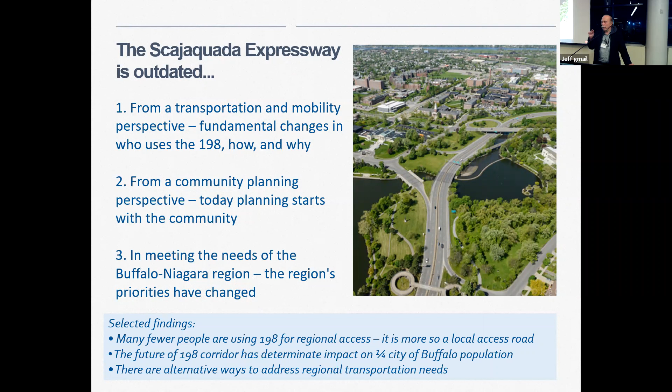One of the things that Hal did, wherever he deserves a lot of credit for - I don't know if he claims it, but he's the one who came up with the idea that instead of looking at Buffalo as a region to develop the context for this planning, let's look at the area, the people impacted by the expressway, and use that as the primary focus site area for planning. Hence the invention of Region Central, which I promise none of you had heard of before Hal invented it, because it wasn't a term. He literally said, this is the place that should make the decision, partly because you will all take the larger region's needs into account. You all share the same place, but it is from this physical base that we should plan in the 2020s, because these are the lives that are impacted.

Is this making sense? These are the people who decide I want to live here or not, which is what matters.

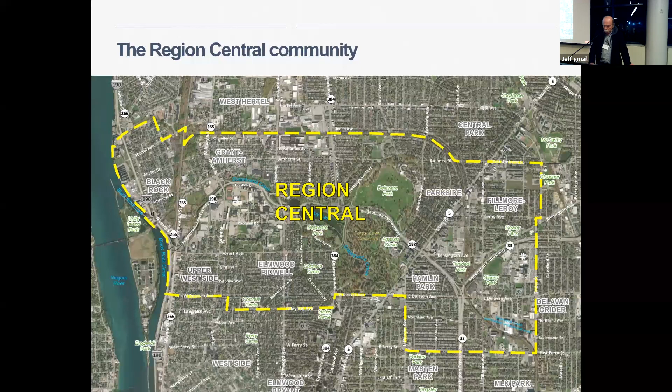So the process that many of you have been involved in for much longer than I have began with years of this - to review the planning history of this place. How should I say it - it brings some frustration, because it basically ground to a halt for the right reasons. They couldn't make a decision because they didn't have the right alternative on the table yet, because they didn't have a process for getting to the right alternative. And that's not a criticism of anybody. It's because we learn as we go.

So people learned, and people like Hal developed a new process from a baseline analysis that really looked at Region Central, what its needs and aspirations were, engaging folks like you who have a terrific and very generous set of values. I want to say one of the things we observed quickly is that there are not conflicts among you as to what the priorities should be, which is very interesting.

You all tend to, and I hope I'm not overclaiming, share the same priorities for a more livable neighborhood, a more equitable Region Central in Buffalo, a place that nurtures economic opportunity as it's understood in the 21st century when we have a knowledge economy that is what grows.

You are very interested in not just reclaiming the Olmsted legacy because it's something to be proud of, but because it was grounded in a wonderful way to enjoy and celebrate nature in the midst of a city. And it's been really inspiring to us to see the visceral desire to bring that back and have access to it and give everybody access to it.

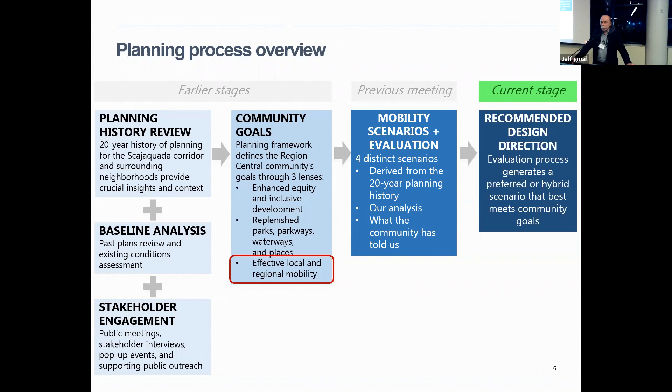So on that note, thank you so much for being here. Ask us any questions, we'll be gathering in front of boards you don't see yet afterwards. When I come back in 20 years, I hope to see you all at yet another meeting celebrating the fact this is open, maybe in 5 years. Anyway, thank you very much.

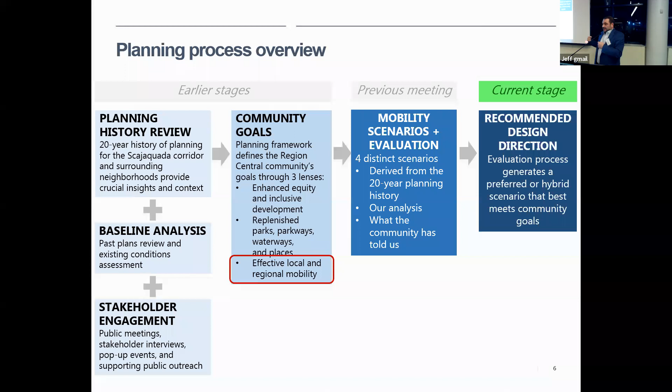Just to go over this, this is where we are. We're all the way at the end of this process, where we're going to present to you the recommendation of your process, right? All of our work and interpretation of everything we've heard and seen boils down to this. We did much work in the beginning: review of all the work done before, analysis, heard from all of you, translated that into goals, what do you want to see, and then developed scenarios and tested them. I'm going to go through that a little bit and then where we are here today.

If you were here in May, and many of you were, you may remember we developed 4 scenarios and asked you to comment on them. Many of you told us which ones you liked, and that's fine, and we adapted those based on the feedback we heard. Those 4 scenarios represented a kind of range of outcomes, and our goal here is not a final design, it's a design approach. I'll explain that a little bit later.

Those 4 scenarios ranged from something that is the status quo, a corridor that looks much the same as it does today but better, all the way down to something like full removal, as if there was no road, no highway, nothing else, replaced with parkland or something that looked more like what used to be there before they built the highway. These are the exact visuals we showed at that meeting before you all marked them up and commented on them, showing those approaches to the corridor, where there would be a road, intersections, ramps, new crossings, and what we might do with some of the parkland or things that would replace it.

We presented all of those again. By the way, if nobody said it, all of these slides are also going to be available online, people can go look at them, I can spend more time with them. So I'm not going to spend a lot of time reading the details of them here, they're too rich for that kind of environment.

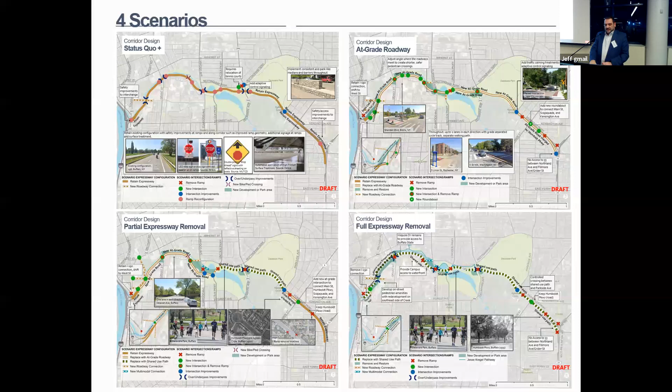Many of you commented on the specific scenarios that we were testing. You may not remember, but you also commented on these - these are the lenses, if you will, that we said, these are the things that you care about.

These are the things we heard from past processes and through this process, that you wanted a Scajaquada corridor and a region central that accomplished these things, right? We really put them into 3 buckets. The first is effective local and regional mobility. That means many, many different things.

And we broke those down further, and there's an example in the green of how we translated that into metrics. So something like, how many locations are there to cross the Scajaquada corridor? And we evaluated each of the scenarios against that, as well as the existing.

The second is replenished parks, parkways, waterways, and historic places. So how much can we recreate what was here or make it better in today's context, not an 18-whatever context?

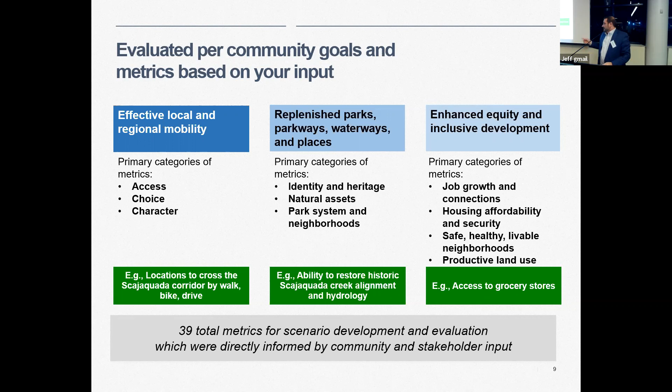And then the third is enhanced equity and inclusive development. And again, we translated all those big picture titles into specific goals and metrics, right? And you all commented on those and we adapted them based on those meetings. We developed subcategories. Believe it or not, we developed 39 of them, total metrics for all of these.

And that's the work that we've been doing since May as a team, as a full team, including the GBNRTC folks, is taking each of those scenarios, developing them to a certain level of detail so that we could evaluate them against those goals and metrics.

Now, 4 scenarios, 39 metrics. If I tried to talk through all of them, we'd be here for 5 hours and you would be running me off the stage. So we're not doing that tonight. All of that will be available.

That's not to say it scored the highest against every particular metric. We paid particular attention to those things and tried to adapt that scenario and others to include the things that work the best. So we developed from this a hybrid design that builds off of each of those.

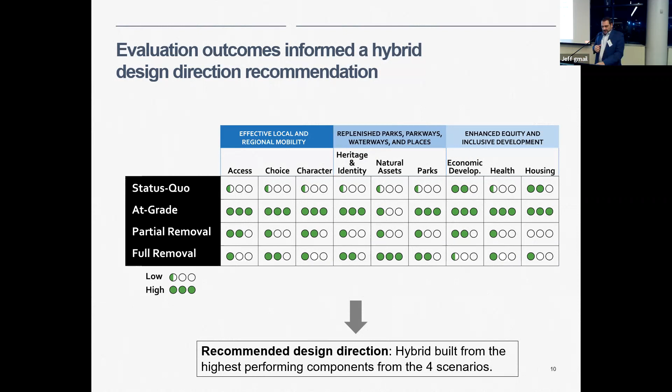And before we do the full reveal, I want to talk a little bit about what we think that does and what we tried to capture. So the recommended through this process, what we're calling Scajaquada Parkway, name is up for debate, is similarly Olmsted Parkway inspired.

It has at least 1 lane in each direction with a potential sometimes for a carriage road. So there might be a through road and a separate road next to it within the right of way for certain segments. Has bike paths and sidewalks throughout.

That was a big part, by the way, of what we heard through the process is how much the current highway and creek actually divides neighborhoods. It actually acts as a barrier, and we proved it with a lot of data.

If anybody remembers the mobility guide and some of the stuff that was put online earlier, it really shows how, depending on where you lived, you did not go to the other side of the expressway. People just don't. The majority of people live their lives this way or this way, not across, in ways that you don't even realize. And again, the recommended design here removes all the ramps.

Even as it exists, many of those ramps we've shown you are substandard. They're short, the mergers are difficult, they're safety hazards. In this, and I'll show you some examples of what this looks like, with 1 lane in each direction, all of the ramps are removed except for ones, and you'll be able to see some of the details that are kept for a specific purpose and replaced essentially with at-grade intersections.

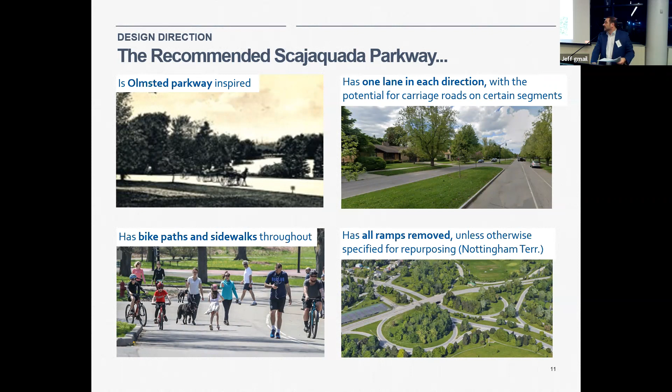And that's what it is, what it does from a public benefit standpoint. You know, and again, having gone through all the metrics, we think that the recommended parkway really enables restoration of parks, resources, heritage assets, not all of them, not exactly the way it was, but the potential to recapture much of that, and in some ways do it in a way that works for today's world.

It creates safer, more direct and enjoyable connections, not just for people on cars, for people walking, for people bicycling, for public transportation. All of those were part of our analysis. They're part of the things you care about. They're part of the metrics.

Again, we think it enhances safety, health, vibrancy of the surrounding neighborhoods by creating more and better ways to access the road, the creek, the park system, and the other side. And as part of doing that, you're able to connect more residents to job opportunities, to economic development. You're able to find ways to reknit some of these neighborhoods back together.

All right, that's enough buildup.

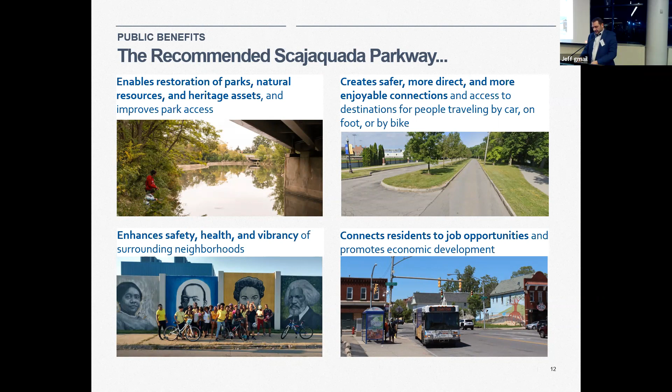So this is our recommendation as a result of that process. I'm not going to read every single thing that's on here. There'll be boards that are hidden for this moment, but as soon as this presentation is over, we'll put them up. You'll be able to walk up to them and ask questions.

So what we're showing from west to east is an at-grade roadway that is essentially one lane in each direction. It has the ability to have turn lanes and things like that, more crossings, additional crossings. I'll show you some cross sections of what we think can be replacing where the expressway is today on the next couple of slides.

We're in some cases removing interchanges. In order to accomplish this, we've stress tested this a number of times. There are places where we're recommending additional on or off ramps, because essentially what we're doing is distributing all of the activity in a different way.

So there are going to be places where there's better pedestrian activity, better bicycle activity, and there's going to be other places for cars to go.

And if anybody remembers, one of the things we looked at earlier is that actually very few people ride in cars from one end to the other. It's less than 20% in one direction, less than 10% in the other. Most folks even on the Scajaquada Expressway as it exists today are really going somewhere in the neighborhood. We're using this as a kind of local distributor.

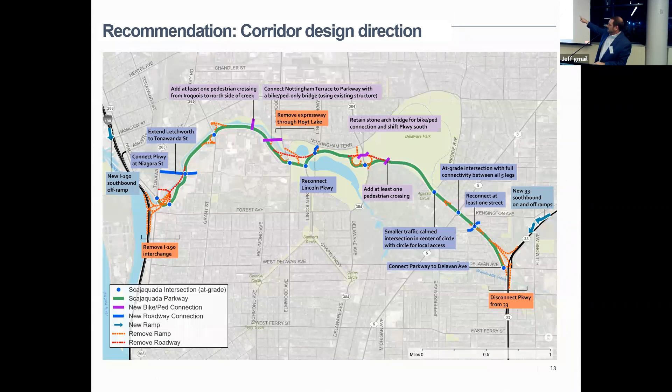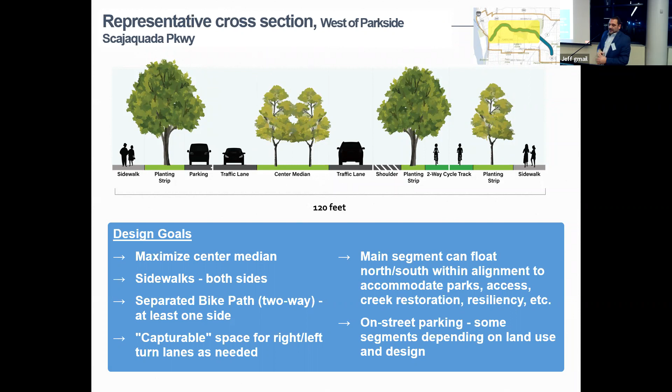And by the way, this is the section of the Scajaquada Parkway that is west of Parkside Avenue. We have a little graphic in the top right, a locus map, that shows what that recommendation is. East of Parkside, which is the traditional Humboldt Parkway section, it's actually even wider - there's a wider cross section there. You're in a cut for part of that.

We're talking about that would be raised up. The intersections would be at grade. You'd have a center road, which would be essentially the through road there, and then calling it a carriage road along either side.

That's more along the frontage of where the houses are, where those residences are, where any of the other land uses are. So that would be the more local access, and then within the middle, you'd have that through lane.

You'd preserve the parking on the carriage roads. Within the center road, you would not have that - you'd have planting strips, you'd have room for bike paths. And again, all of this is a design approach. The specifics of exactly what goes on any of those strips or how that looks are all things for the next process.

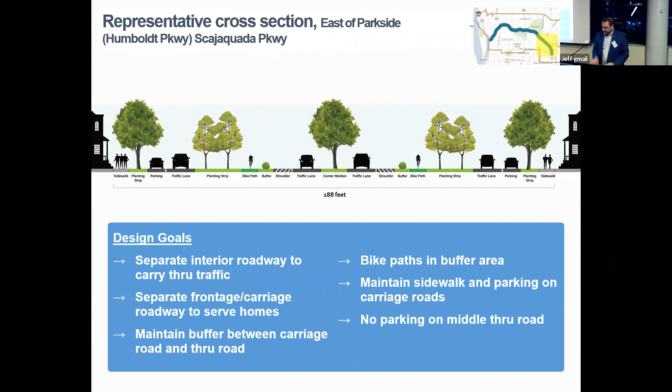Because we're looking at a much larger area, talking about all the things that need to happen in Region Central, each of the scenarios we presented back in May had their own list of other supporting elements that went along with it—the things that should happen alongside an at-grade road, a full removal, a partial removal, or the status quo.

These are new connections, transit upgrades, improvements to surrounding streets within Region Central, and these are some of the things that were considered. We evaluated each and chose the supporting elements that best accomplish those goals within the hybrid recommendation we're showing today. I know I'm throwing a lot of information at folks, but we tried to make sure these supporting elements looked at an associated improvement of almost 14 miles of other Region Central roads, building them for the future while protecting residential neighborhoods and helping folks get around Region Central and beyond.

We will also have boards that show what these are. There are some really critical elements here about key supporting elements. I won't read all the words, but you're talking about new ramps that replace the ramps that exist, so you get off and still access Region Central, just slightly differently—distributing that a little bit more. There are also enhanced vehicle accommodations on certain streets, where we've stress tested this and tried to look at where else accommodations need to be made.

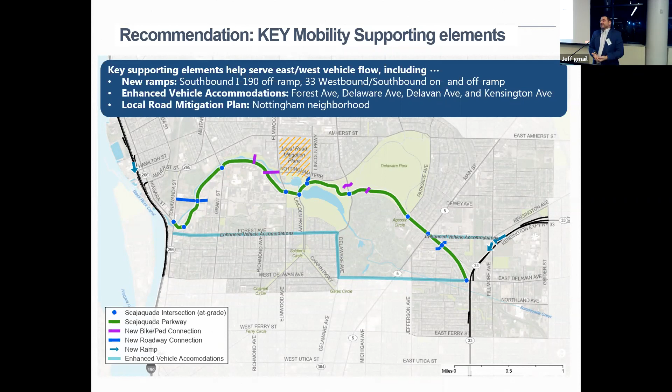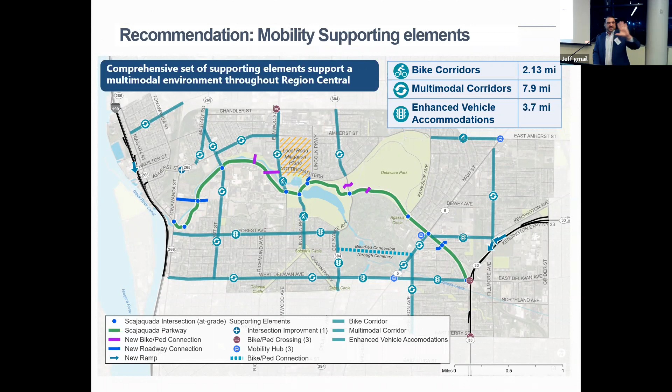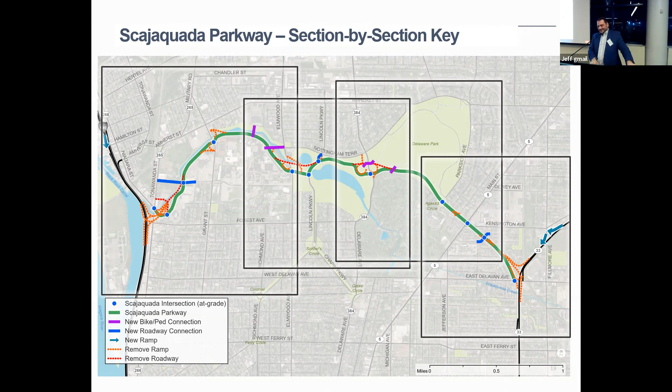There's much detail here, and again, these are all going to be online and on boards for folks to take a look at. Because we know there's so much information and many of you will want to zero in on where you live or go to school or within individual neighborhoods, we did a few key maps that show the areas in much more detail. I'm not asking anybody to read these on the slide—that's why they'll be on boards.

We tried to point out on each of these—there are four of them—starting with the area by Buff State, the actual benefits of this scenario, not just as a whole but in individual locations: for mobility, for parks, heritage, and natural resources, and for inclusive development benefits and equity. Because this is what we mean—this is the kind of work we've done with your help throughout this process to say, when this scored highly for this reason in this place, that's why. That's what we meant by it, that's what you meant by it, that's our interpretation of it.

Not asking anybody to read the words here, but to go to the boards on the side, spend some time online after this, even after you think about it, and want to look at things in a little bit more detail and talk about the individual components for each of these.

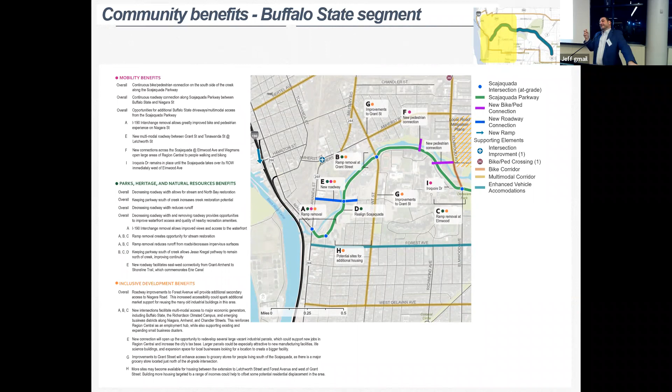So again, this is the Buff State portion. You can see some of the additional connections there. There's a new road where that E is, right? That would be a new connection across to Tonawanda. That's a really isolated area that is kind of derelict right now and creates a huge opportunity for almost anything that the city or the region wants to see there. Connects that to Buff State. When you get into this at a granular level, you can see how those additional connections take place and what they might mean for all the sorts of things we're trying to achieve here.

Similarly for the Hoyt Lake portion, there's a lot of thought that goes into where the road would go and how that would align. Again, a new connection just for pedestrians at the end of Nottingham Terrace there, improvements to some of those connections directly abutting. So it's not just fixing the corridor, but thinking about how you connect from the neighborhood to the corridor. Those are big parts of what we're showing here.

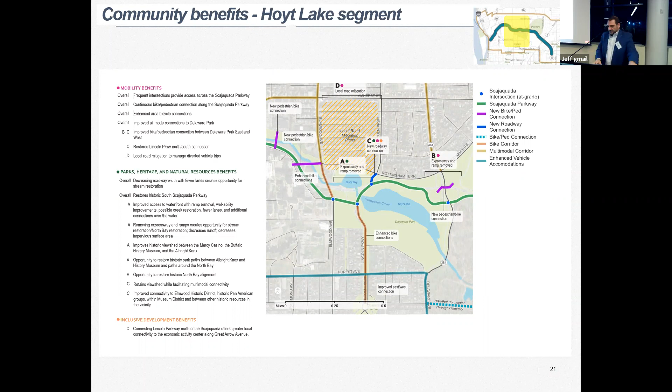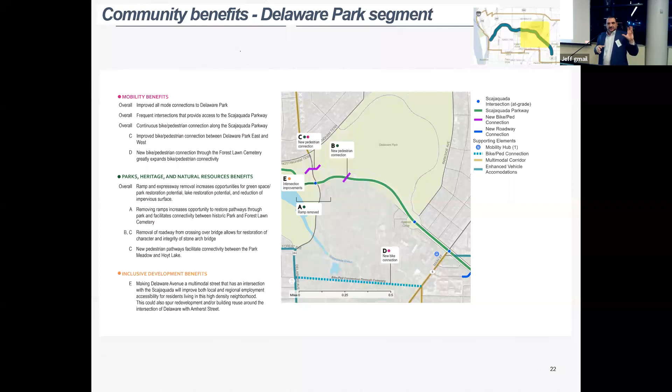Again, by Delaware Park, including a new bike ped connection in the south there. And some of the other improvements here, you can see the ramp removals. I encourage you all to come ask us questions and look at the boards and spend some time looking at the individual components.

And then the last section by Humboldt Parkway, you can see the removal of the ramp connection from the Kensington to Humboldt Parkway and to the Scajaquada Expressway. That would all be replaced at grade, at Delavan, and you see a new westbound ramp where that D is. So if you're coming south, kind of from the airport, that's a way you would connect over into the corridor.

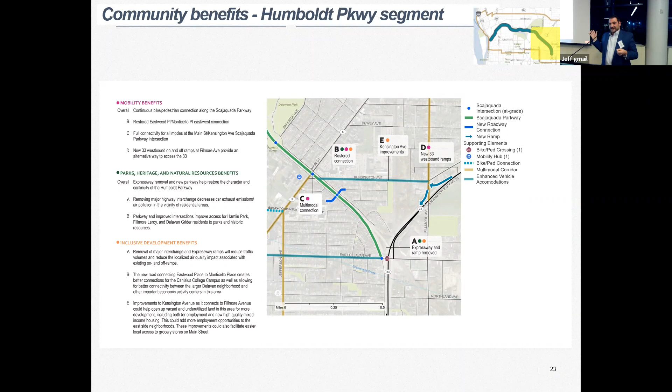We've done our best to translate all of the things that you were looking for, all the various components of our analysis, into this recommendation. So please come up to us, ask questions, think about it, because there's a lot of thought that's gone into each and every single thing that you see on each of these maps.